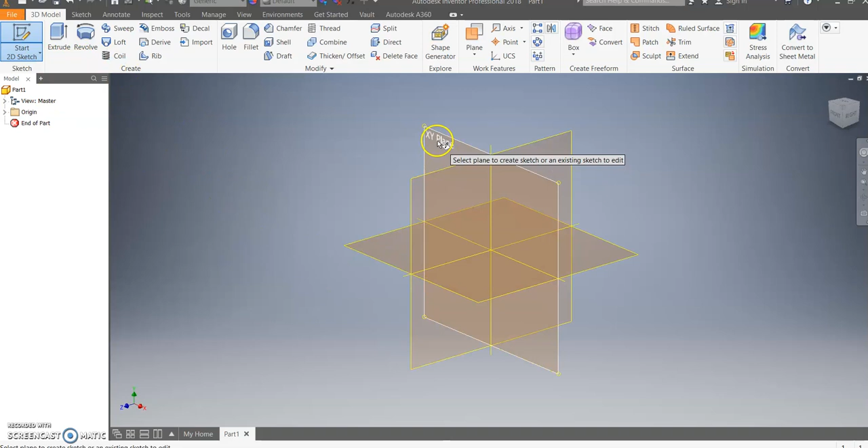We're going to start with the base outline on our part. To do that, we're going to start a 2D sketch, and I'm just going to put it on the XY plane in this case. So we're going to look back at our part, and we're just going to do this front face right here, and extend it out all the way to the edge of my object.

If we count down, we have 1, 2, 3, 4, 5, 6, 7, 8, 9 spaces down, so we're going to go 9 spaces down. And as we go up, we can see 1, 2, 3, 4, 5 up.

When we get to this edge, we will have this additional cutout where it goes in. If we look at it, we can see it goes in 1, 2 spaces on the top. So on the top, it's going to be 7 instead of 9.

So we'll start by creating that sketch using lines. First we said 9 across on the bottom, so we're just going to go across. I'm going to line up on that 0 degree line, make sure it's at 0 degree, type in 9 and hit enter. Then I'm going to zoom out so I can see where that object is located, because I'm not zoomed out far enough to see that 9.

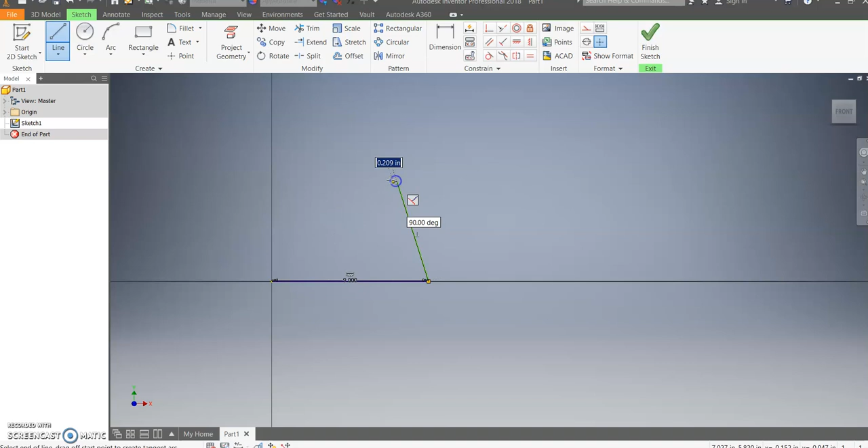And I'm going to go up. Where I go at this point, it does not matter—I can fix that dimension here in a little bit. So I'm going to go up, place a point, and then go over, straight over. I want to be at the 180 degrees here and go straight over until we've hit the inline. Then I click, and then I'm going to go straight down.

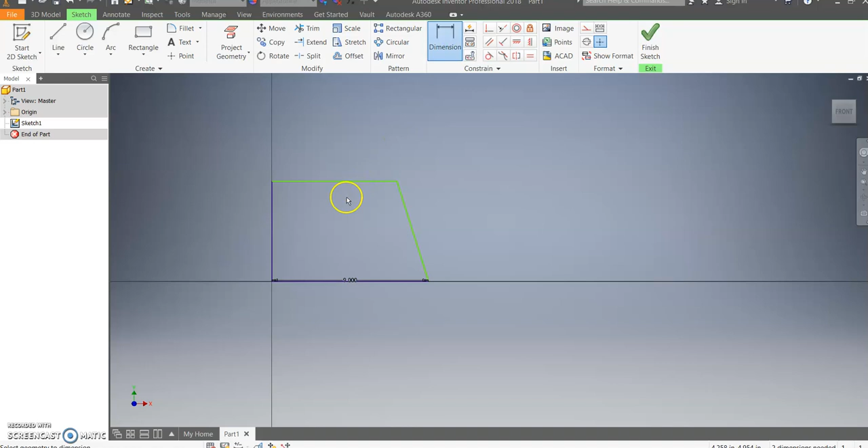And right now it's not the right size, so I have to use this dimension tool. I'm going to start by dimensioning this top line. We said that should be 7. It's close, but not right on, so we're going to type in 7 and hit enter.

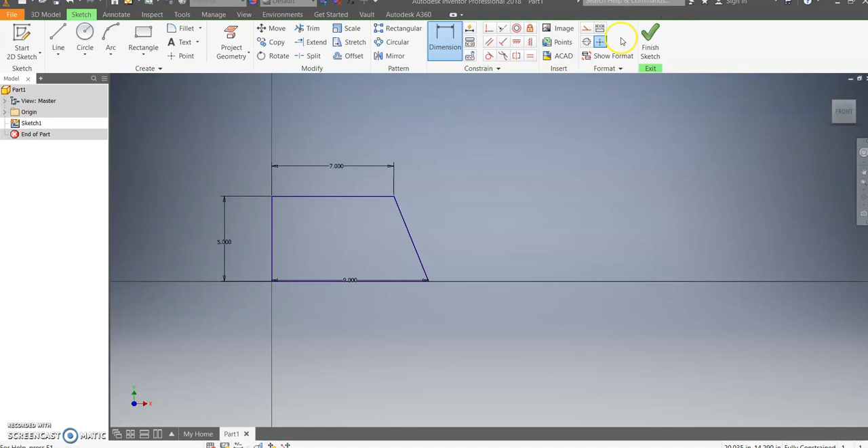We're going to do the same thing on this side, type in a 5 and hit enter. Now our object is all purple, which means it's been dimensioned fully. And we can finish the sketch and extrude that shape.

So we're going to hit extrude. I'm going to click on the shape, and we want to see how far back it goes. So we look at our object and count again: 1, 2, 3, 4, 5, 6. So we're going to go out 6—type in 6 and hit enter. And that gives us a base object.

Now we're going to have to look at these cutout pieces. So we're going to have to sketch these cutouts, and obviously we're going to have to cut them out. If I start from the outside edge, I can see it goes in 1, 2, 3, 4 on the bottom, and on top it should be the same 1, 2, 3, 4. So it goes in 4 in both places, and it matches the shape of the existing object.

So to do that, I'm going to start a 2D sketch on that outside face, the same one we were counting on, and again I'm going to make lines. So I'm going to start on the edge and go over 4. I'm just going to type that 4 in once I'm on that line and hit enter. Then I need to go up top.

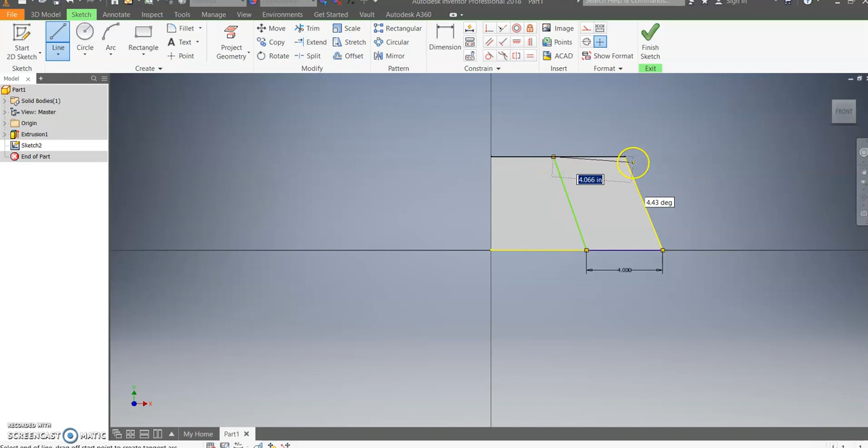I can either set it up by creating a line on top, or I'm just going to click and dimension it, making that a closed shape. So I'm going to go up, click, then go over, click, and I can re-dimension that after I close my object. Then I'm going to close my object by going to the bottom corner, making sure I'm on that green dot, and then clicking that green dot.

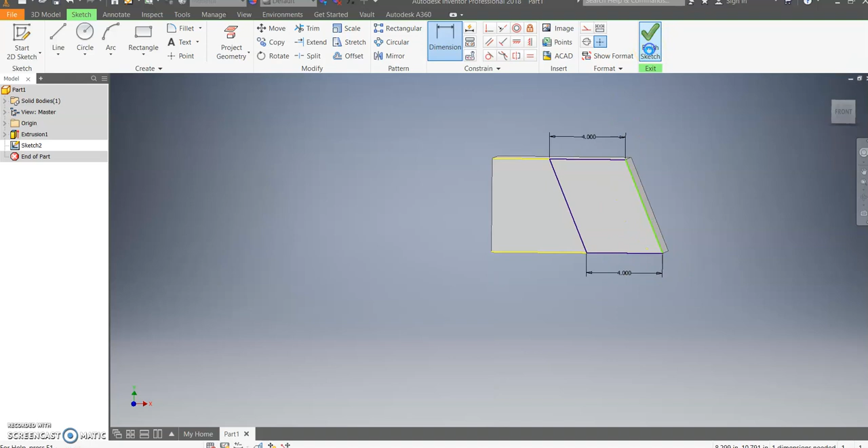Then I still have to dimension the top, so I'm going to click corner to corner on the top—the inside and the outside corner. That's supposed to be 4, so I type in a 4 and hit enter. Now I have this shape dimensioned and it's constrained, so I can finish my sketch and extrude it.

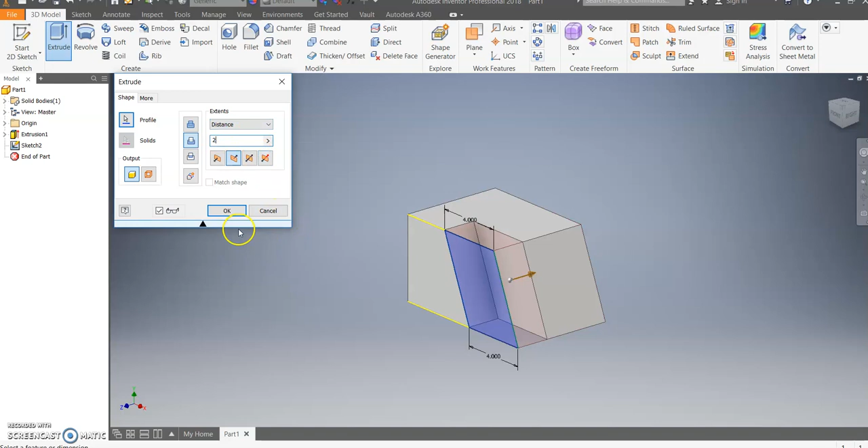We want to see how far it goes in, and if you count, you can see it goes in 1 and 2, so we'll go in 2 here. So we're going to do an extrude—this time we don't want it going out, we want to cut, which is the second option down. So I want to cut, and change the distance to 2. Then I hit OK, and that creates my cut on this near side.

Next, I need to do the far side. There's a variety of ways you can get this shape created on the far side. I can sketch the same exact shape I just drew—that's perfectly fine, it will give us what we need. Or there's a variety of other ways, such as mirroring and projecting geometry to get there as well.

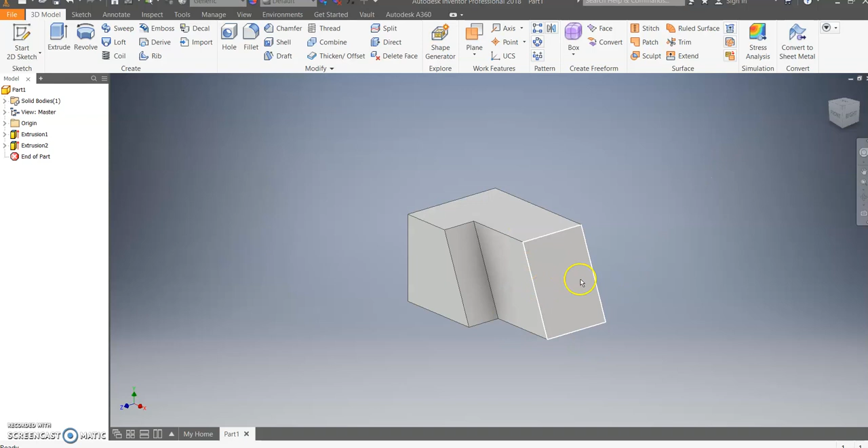So first I need to turn to that far side and start to sketch on that far side. Once I'm here, there's a variety of different ways—this time I'm going to use project geometry. So I'm going to turn my object back to see the front face, click on that shape I just cut out, and that projects that face to the other side.

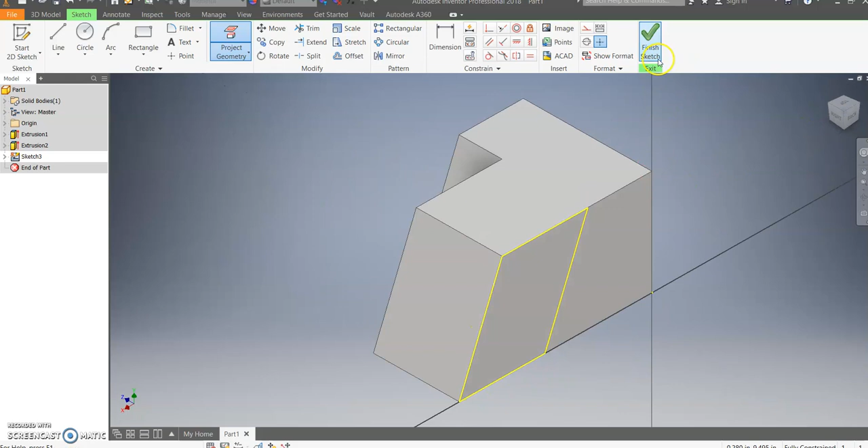Now that I have it there, all I have to do is click Finish Sketch, and again extrude, do an extrude cut. If we look back at our diagram, we can see it's 1 and 2 again, so it's the same distance. So I'm going to cut that the same distance—extrude, make it a cut, cut 2, and hit OK.

If I click on my home on my ViewCube, you can see I have the same shape as you see on the ISO sheet. Hopefully this helps you as you create your isometric objects. This is the first one in the series—we'll go through all 20 as we progress through the series. Thank you and good luck.